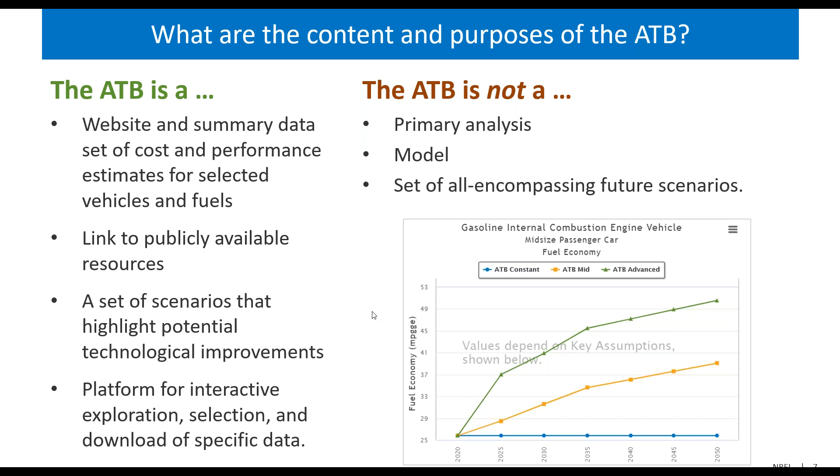So this slide provides an overview of the content of the ATB. Essentially, we're collecting a wide variety of input data about vehicle component costs, fuel and blend stock costs, and then compiling this into vehicle costs, fuel economy, well-to-tank emissions, and fuel costs, which are then used to calculate a levelized cost of driving and a well-to-wheels emissions metric, with certain assumptions about discount rate, VMT, and vehicle lifetime.

I think it's important to note here, in some efforts, the outputs are really the main focus. In this data set, the inputs and outputs are equally important, if not the inputs, perhaps to some of you, being more important than the calculated outputs. That's just important to note, that the outputs are not the entire point.

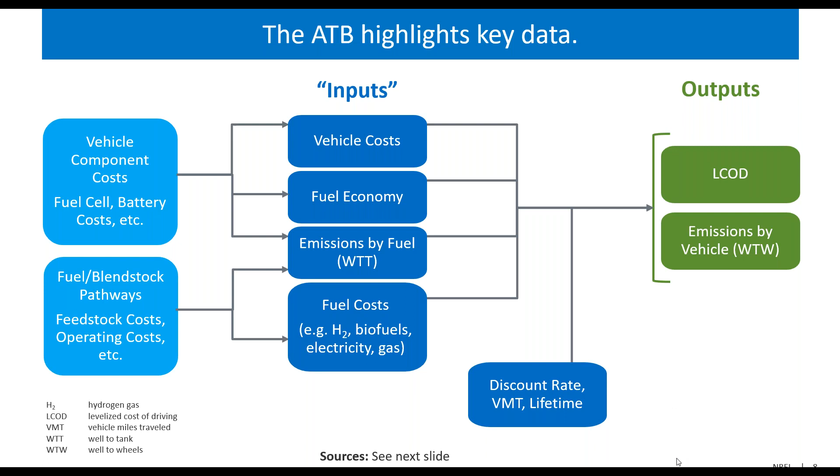And we pull this together from a wide variety of sources, which are on the next slide. So the primary sources of much of the data are listed here. There are many others listed line by line in one of the downloadable spreadsheets for the ATB. We hope that provides a strong framework for documentation so that you can track down data and understand exactly what it is that we're pulling together here.

I note on the vehicle cost components and the vehicle costs and fuel economy, much of these are input assumptions from Argonne's Autonomie modeling and also results from Autonomie modeling. The fuel data often comes from techno-economic analysis reports conducted across the biofuels pathways by the National Lab System in support of DOE. The fuel emissions at a well-to-tank level come from Argonne's GREET model, and a variety of other major sources are noted here.

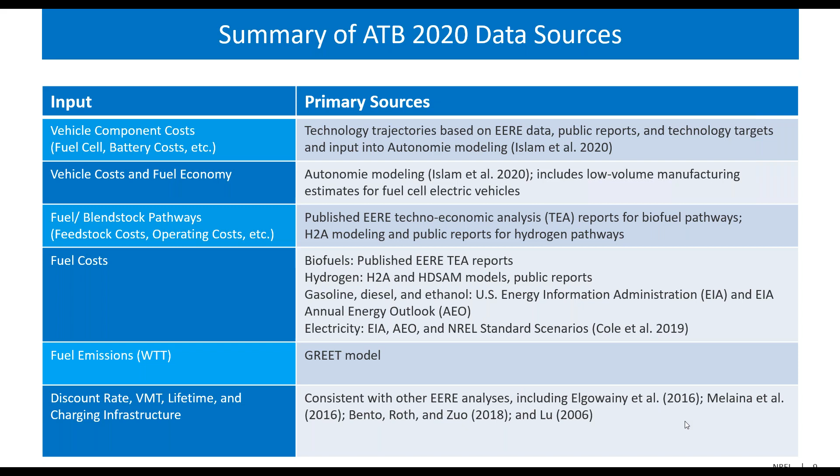So what value are we hoping to provide with the ATB? It's our hope that this will be a transparent, consistent, credible, and accessible source of data. We're consolidating from a lot of different sources, with an emphasis on DOE's sustainable transportation analysis and the national labs that support that. This is also for use within DOE and the national labs, as well as to publish those sources.

We were aiming to summarize data at a high level for system-wide analysis. So while many of the resources that we refer to dive deep into specific components, this effort is targeting translating that detail up to a higher level. And we're really trying to have this be very organized to support users in exploring the interactive charts, selecting and downloading specific data, which is free and publicly available, and we hope easily accessible.

And if, as you use the ATB, we are falling short of these goals, we would really like to hear about it. The website does have a comment function. We really welcome and value your comments and hope that you'll let us know how we can improve.

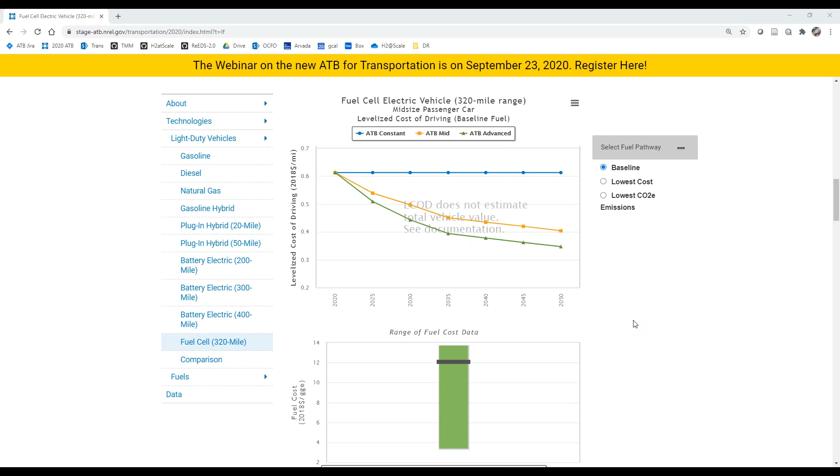So this chart shows the LCOD trajectory on the top. As I mentioned before, the vehicle cost and fuel economy are trajectories, but the fuel price and emissions are just single point estimates held constant over time. So these trajectories reflect the improvements in vehicle technologies, while the fuel estimates are held constant, and it's just showing fuel for one fuel pathway and one fuel scenario in the trajectory.

But the bottom of this chart gives you an idea of the LCOD given one fuel, but also the range of different fuel pathways included in the ATB. This bottom chart shows the range of fuel costs for all the different hydrogen pathways included. The black line represents the current pathway selected in this chart. Right now we're selected on the baseline fuel, which is kind of a current modeled SMR hydrogen, and the LCOD above reflects that price.

So if you hover over the data, you can see the selected or currently the baseline fuel, and that's at a hydrogen price of about $12 per GGE. But you can also see the other range of fuel costs included. We have a maximum fuel cost pathway, which is the current market SMR at $13.70, and the minimum cost fuel pathway, which is the future modeled SMR. So you can see the range of fuel costs, and using the filter on the right, you can see the impact of changing between those different fuels and the impact on the LCOD.

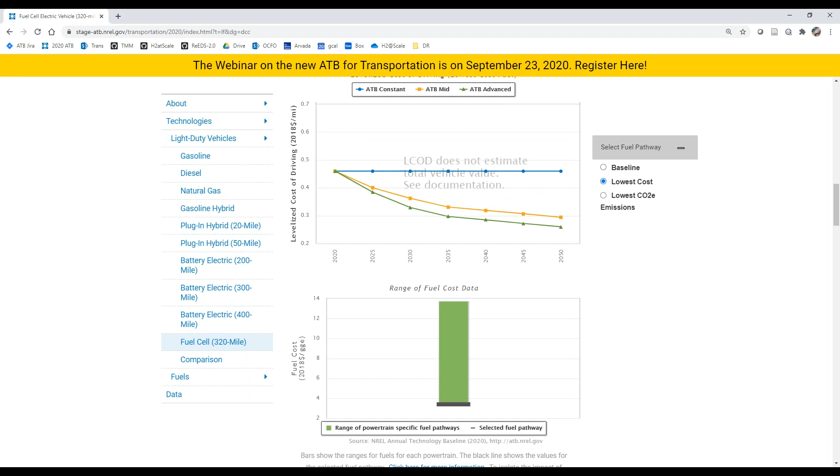So for example, using the baseline, you can see the LCOD in 2050 in the advanced scenario is about 35 cents per mile. But if we switch to the lowest cost fuel pathway, that decreases pretty substantially to now 26 cents per mile. And you can see on the bar chart on the bottom that now that black line where we are currently is on the bottom end of that fuel cost range.

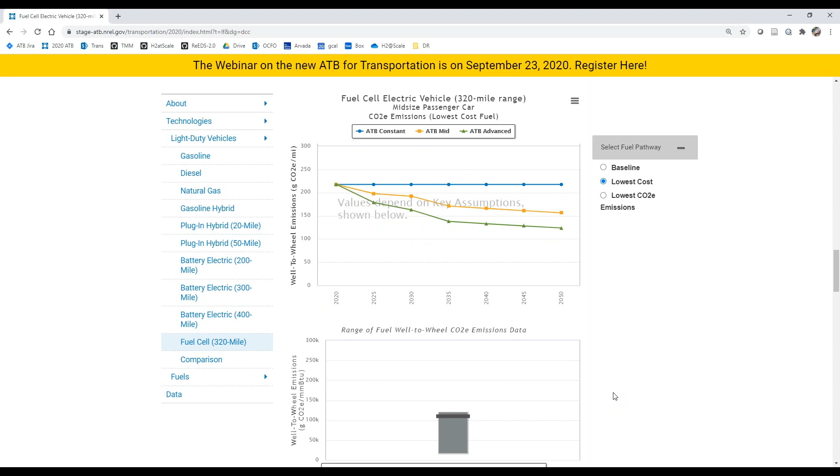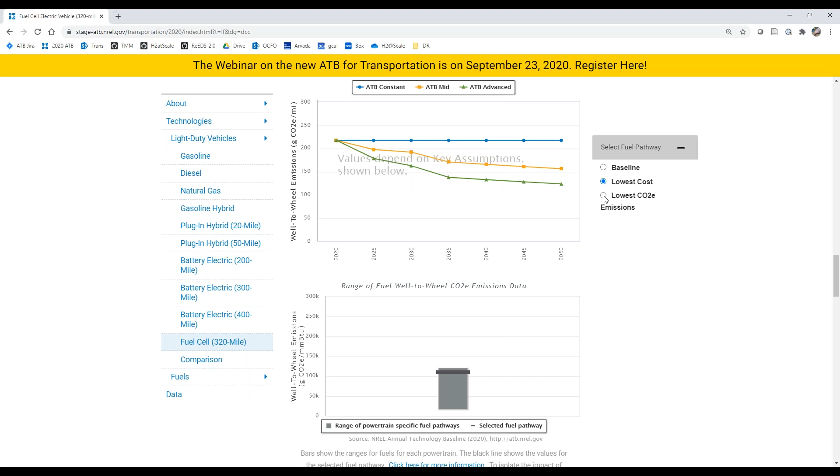So if you scroll down, the CO2e emissions chart shows well-to-wheel emissions in grams per mile, and this has similar functionality. You can see the emissions associated with that lowest cost fuel, but then you can also see how that changes if you select the lowest CO2e emissions fuel. Large decreases, and now you can see that you're at the bottom of that range, and you can use this to explore the range of other pathways and emissions that are included here.

Again, for the vehicles, just similar to the fuels, we have all of the key assumptions that are included for this technology, as well as the definition links and the references.

Hey, Paige. Yeah. While you're on this page, there's a question about the future scenarios for fuels and if they reflect estimates for 2050. Can you give an example of what that looks like here?

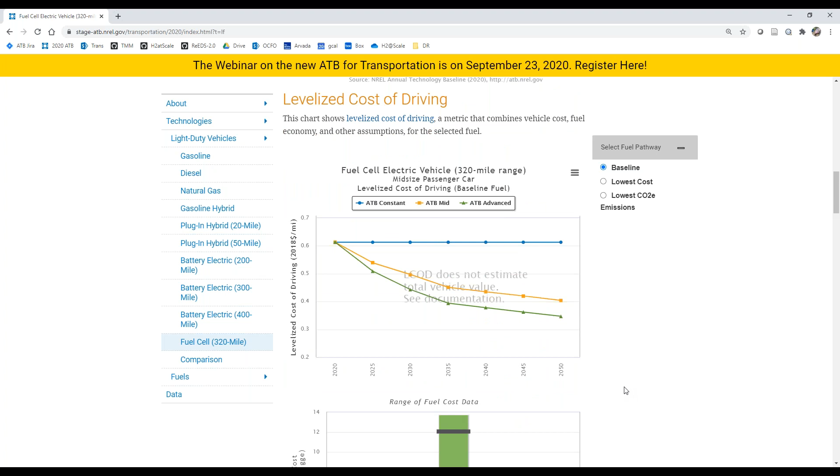Yeah, so the fuels, we don't necessarily have a specific timestamp on them. Rather, they're estimates of technology advancement as well as production volume. So for example, if you choose a future scenario here, it's going to apply to all of the years. The reason being is that we don't exactly know when that fuel is going to hit that level of technology progress or that level of technology volume, if that makes sense. So we don't have an associated year, we just apply that future pathway to all of the years in this estimate, just to see how that type of advancement would affect LCOD or emissions.

Laura, feel free to jump in, I can comment a little bit on that as well. So folks who are familiar with the techno-economic assessments done for DOE's Bioenergy Technologies Office, those techno-economic analyses have the concept of an nth plant. So the idea is that's the techno-economically feasible characteristic of a plant that could be achieved at full market volume and technological maturity with the innovations described in those analytic reports. So it's separate from any particular time frame because of the uncertainty about that.

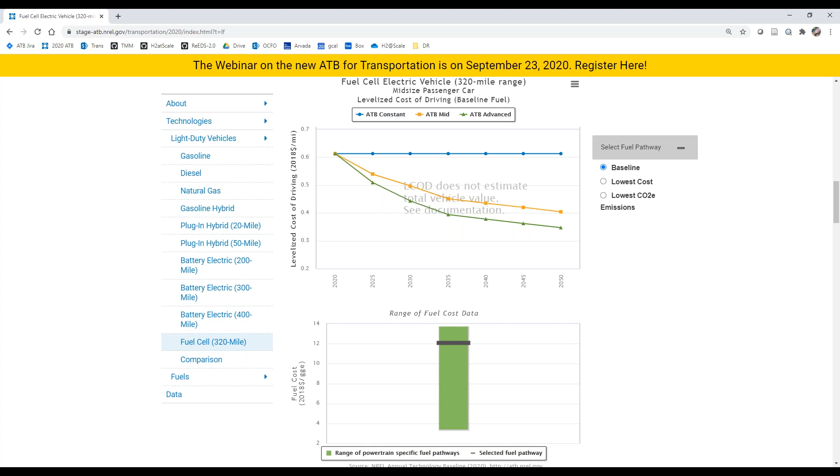Is that okay, Kara? Were there any other questions? That's it for right now. Feel free to ask more too if that didn't wholly address your question.

So I'll show one more example of a different powertrain to see how some of these metrics might vary. I'm showing a battery electric vehicle with a 300-mile range here.

It follows the same flow as the fuel cell. The vehicle pages kind of follow the same flow. So you can see the BEV has similar trends of improvements in fuel economy over the different scenarios, and again this is due to advances in powertrain technology, things like lighter batteries, increased motor efficiency, as well as lightweighting.

And then for vehicle costs, we also see large decreases here, and again this is primarily driven by reduction in battery costs. But similar to the fuel cells, it's not just about cheaper batteries, it also reflects the reductions in power requirements as the vehicles become more efficient. So your battery is cheaper, but you also don't need as large a battery to get the same vehicle range, so you have cost savings there as well.

Can you also point to the documentation of those component level costs? Yeah, the component level costs are all included in the definitions. We include the definitions for the different vehicles, fuels, and scenarios. And for each of the powertrains, we've included the associated component level assumptions. For example, in the BEVs, we have the assumed battery cost trajectories over time.

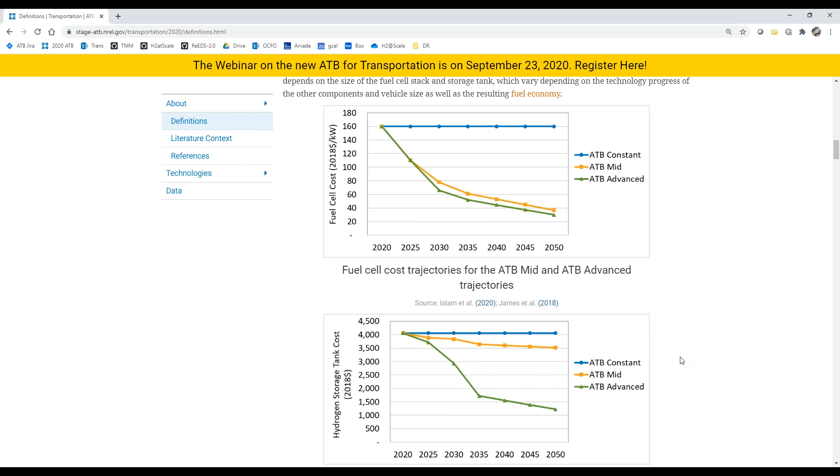This is based on work from the Argonne team and the assumptions that go into their Autonomie modeling, so you can see the battery costs here. And similarly for fuel cells, we include the assumed fuel cell cost trajectory as well as the hydrogen storage tank cost. You can review those assumptions here, again on the definitions page.

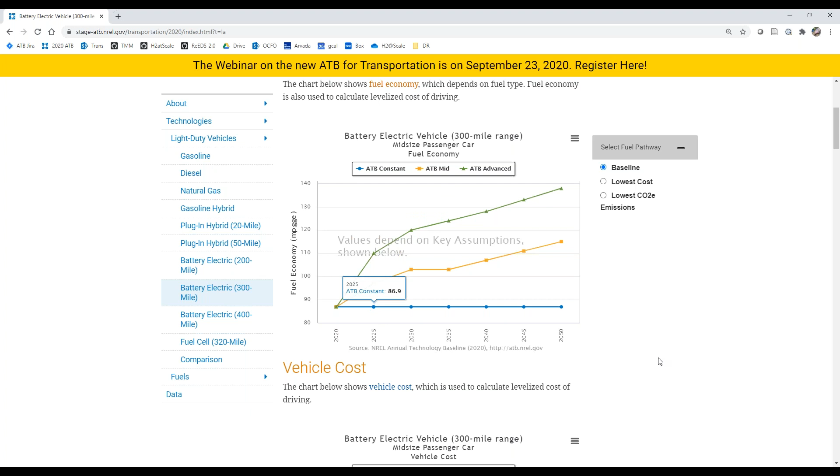Those component level assumptions were used in the Autonomie modeling at Argonne, and then those Argonne results for the vehicle level costs and fuel economy are what we're showing on the ATB.

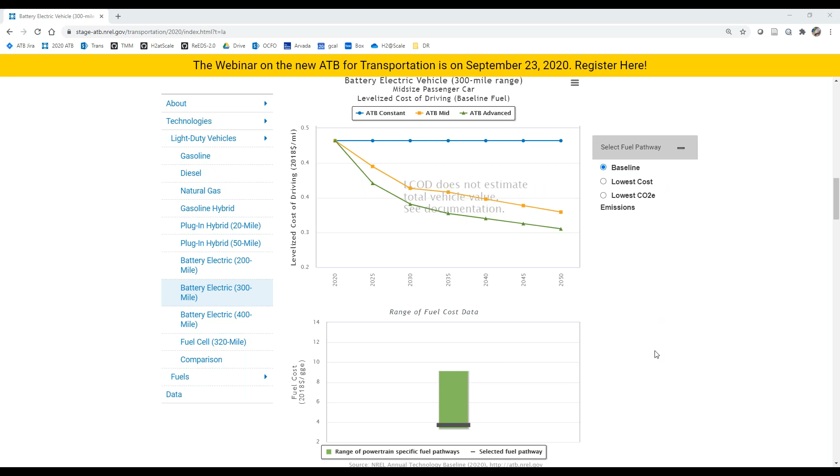So that was vehicle costs. Again, you can see the levelized cost of driving and see the impact that the different fuel pathways have on that. And then similarly for emissions, so I can show an example.

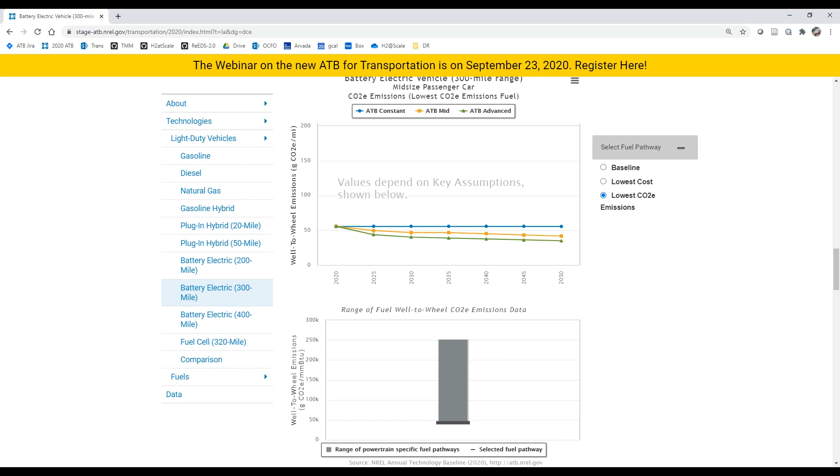This is showing the baseline fuel pathway, but if you select the lowest CO2e emissions, you can see large decreases in emissions due to an assumed cleaner grid mix of that electricity. And again, all of the key assumptions for that vehicle are listed here, so you can dive into more of the detail.

So for all of the technologies, can you point out where we get the emissions assumptions? The emissions assumptions associated with the electricity. So the emissions shown here are the well-to-wheel emissions, based on what the emissions of the electricity is.

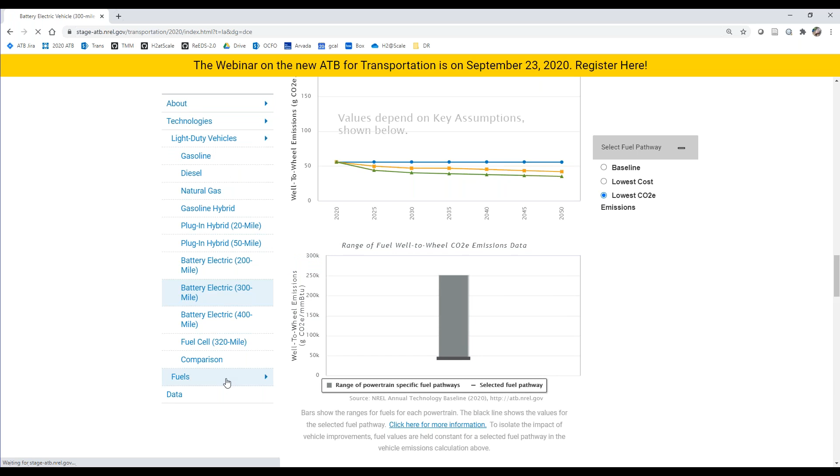So let me go back to the electricity page. The electricity page has the fuel emissions assumptions for all of the different grid mixes. For electricity, for most of the fuels, these emissions estimates are coming from GREET. Some, for some of the biofuels, are coming from specific analyses for those biofuels.

But for electricity specifically, we have the different assumed grid mixes. We're using the GREET model from Argonne to then estimate what the associated emissions are for that electricity. And then going back to the BEV.

On the electricity page, it shows the emissions per BTU, or per energy unit, for that fuel. And the well-to-wheel emissions shown here also incorporate the emissions of the fuel, but incorporate the efficiency of the vehicle as well. So you know how much emissions are associated with an energy of fuel, and then the fuel economy tells you how much fuel is needed to go per mile. So this well-to-wheel emissions incorporates both of those aspects, the fuel and the vehicle.

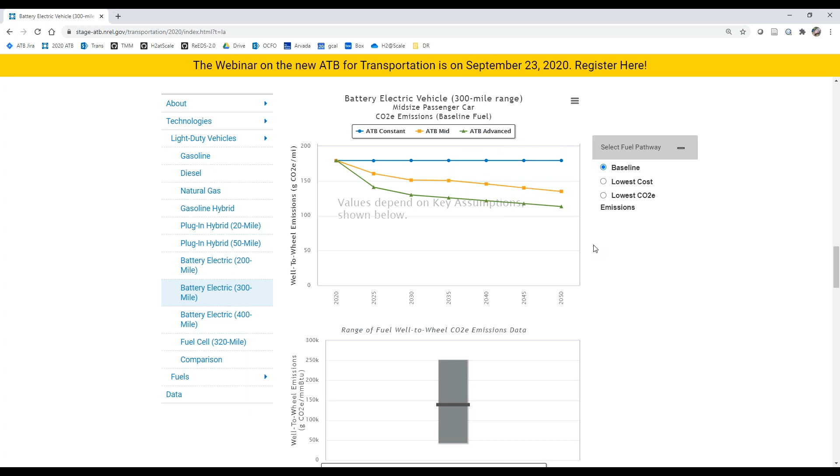Is that what you're asking, Kara? Yep. Awesome, okay.

So again, where was I? Okay, so the pages here, you can explore each of those powertrains on their own. They have similar charts, but we also include a comparison page so that you can start to view these powertrains side by side. At the beginning of the comparison page, we include some important notes that we think it's good to consider before comparing these different powertrains and saying which is more or less competitive.

These notes are that there are many different factors that go into a purchase decision of a vehicle, and some of these factors might not be directly tied to cost. For example, things like refueling time and convenience - being able to fuel your vehicle quickly, or fuel or charge your vehicle at home. And then the availability of different makes and models - maybe you want a specific powertrain, but it's not available in a small SUV, and that's the type of car you want to get. And then the introduction of new technologies like autonomous vehicles. So all of these different factors might make technologies more or less favorable from the perspective of a consumer. It's important to consider these different attributes when looking at comparisons of cost and LCOD, and drawing conclusions about the competitiveness of different powertrains, since it's not just cost - there's lots of other factors that go into buying one type of vehicle over another.

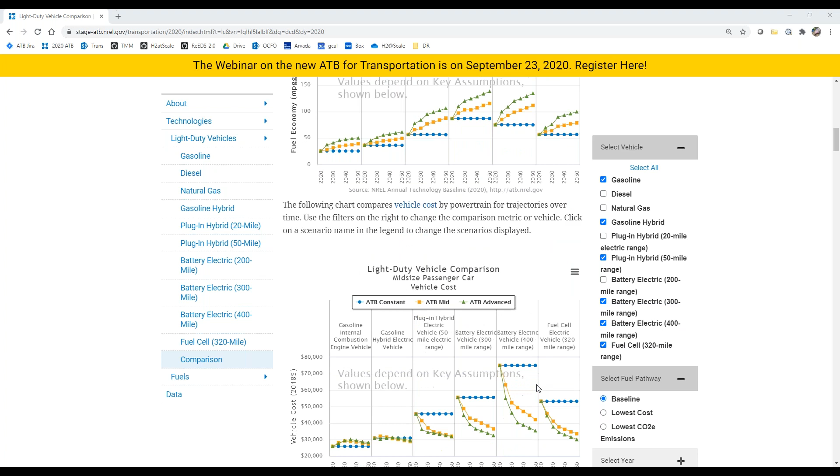But if we go to vehicle costs, things start to look a little bit different. You can see how the vehicle cost trajectories compare for all of the different powertrains. For fuel cells and batteries, we saw pretty large decreases in cost due to decreased component costs as well as other things. But if you look at more established technologies like internal combustion engine vehicles and hybrids on the left, you don't see those strong decreases, and in some cases you even see increases in cost. This is due to the increased penetration of advanced engine technologies - these are added to improve fuel economy of the vehicles, but they also come with higher costs. So you see cost increases there, but we don't see that in the advanced powertrains, since those decreases in component costs - the more expensive parts of the car like batteries and fuel cells - outweigh the cost increases for those higher efficiency technologies.

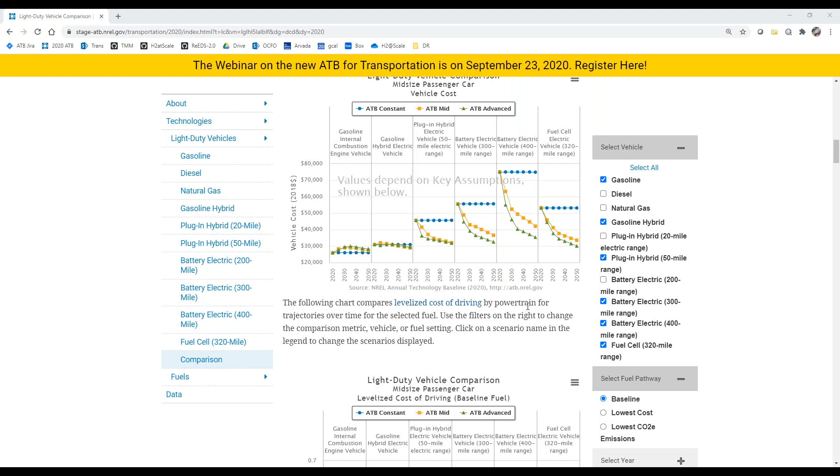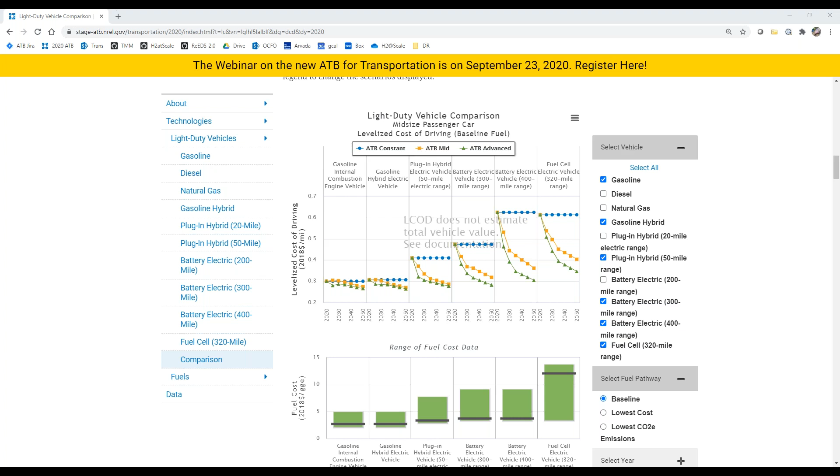Moving down, you can see the comparison of the levelized cost of driving. You can compare both the vehicles, the trajectory of the LCOD, and then with the panel on the bottom, you can also compare the range of the different associated fuels and fuel pathways with those powertrains. You can see how the cost of fuel on a dollars per GGE basis varies for all of the different fuel pathways. This chart shows the LCOD, just assuming that baseline fuel pathway for each of the powertrains. But you can see how this comparison changes if, for example, we select the lowest cost fuel pathway for all of those vehicles.

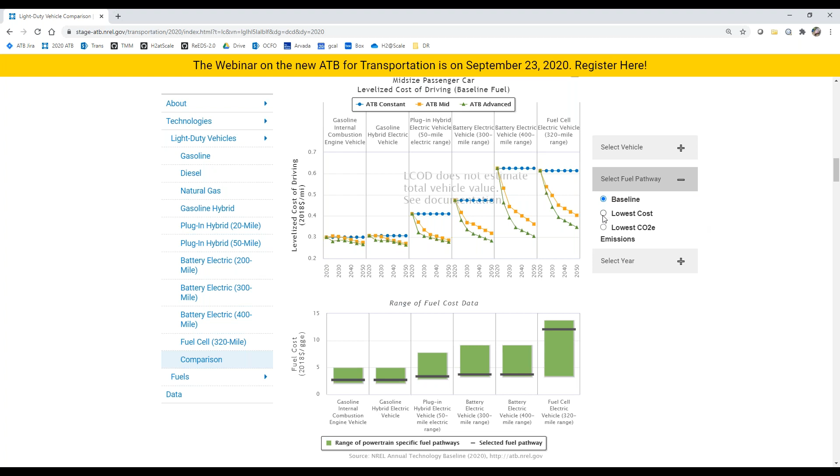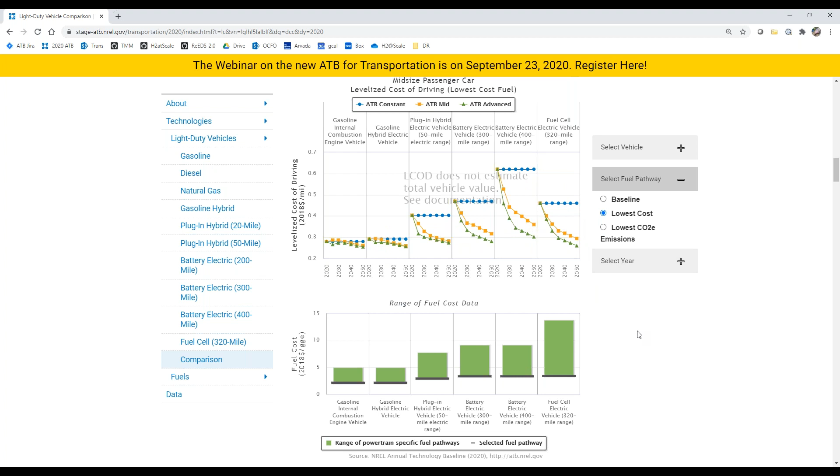So if you select lowest cost, it looks a bit different. One example is that now the fuel cell becomes more cost competitive on an LCOD basis with some of the other technologies.

If you scroll down, there's this, again, the same functionality for emissions. You can choose the lowest CO2e emissions and see how that changes the picture of per mile well-to-wheel emissions.

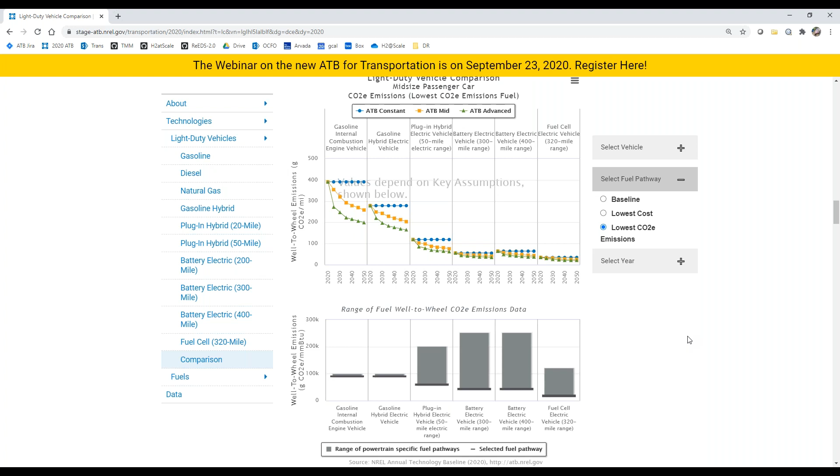So all the vehicles and fuel technologies pages are really the key content for the ATB, but I want to end the demo by mentioning a few other important pages on the site.

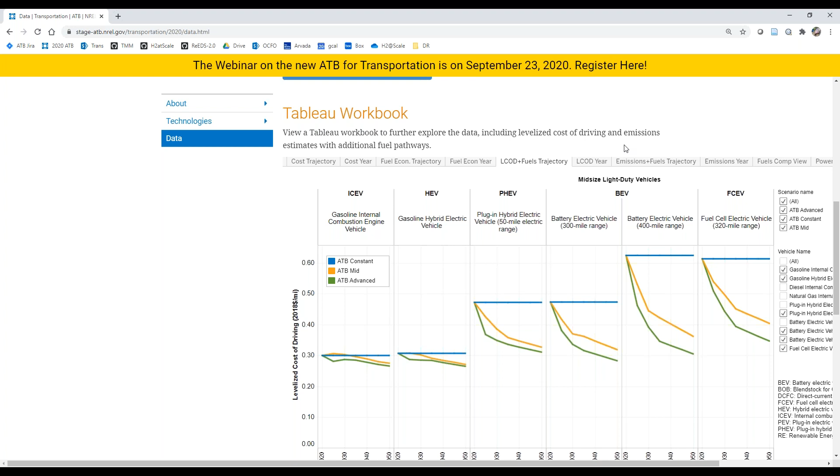And on the data page, we've included an embedded Tableau workbook, in case you don't want to download all of the raw data and create the visualizations on your own. We provided this so you can explore the full set of data.

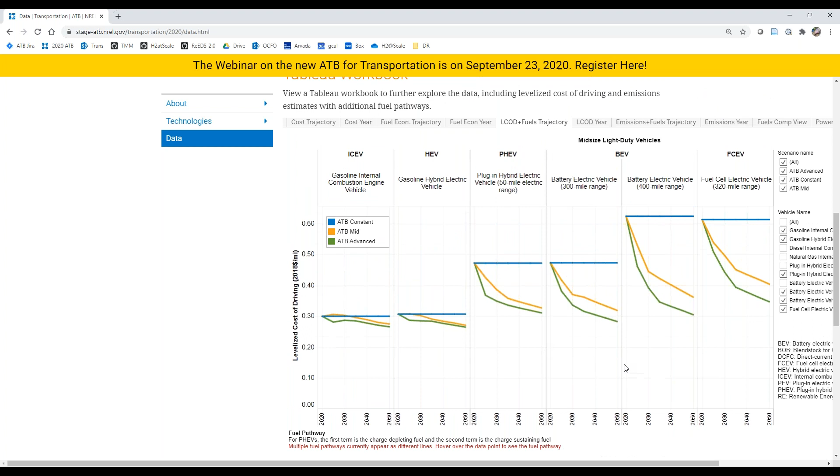For example, this shows the levelized cost of driving for the different powertrains. But if you scroll down, you're allowed to select between all the different fuel pathways available, not just the baseline, lowest cost, lowest emissions. So this allows you to explore that without having to download and create your own visualizations.

And lastly, but definitely not least, is the contact page. We would greatly appreciate any feedback or suggestions on how to make this site better, especially since this is our first year of the transportation ATB. We really want to make sure it's meeting any needs you have — whether that's different technologies to add, different metrics, other sources or references we should consider, or basic website structure, functionality, and navigation. Any feedback you have would be very welcomed.

So that's it for the web demo.

I'll close with just a few remaining slides. I hope it was useful in giving an overview of the scope and functionality of this website. We're really striving to make this a product that's credible, consistent, transparent, relevant, and accessible — all the things Laura mentioned. We want it to be useful to other analyses looking at current and future transportation technologies. Again, we welcome any comments or feedback on how we can improve this site in coming years and releases.

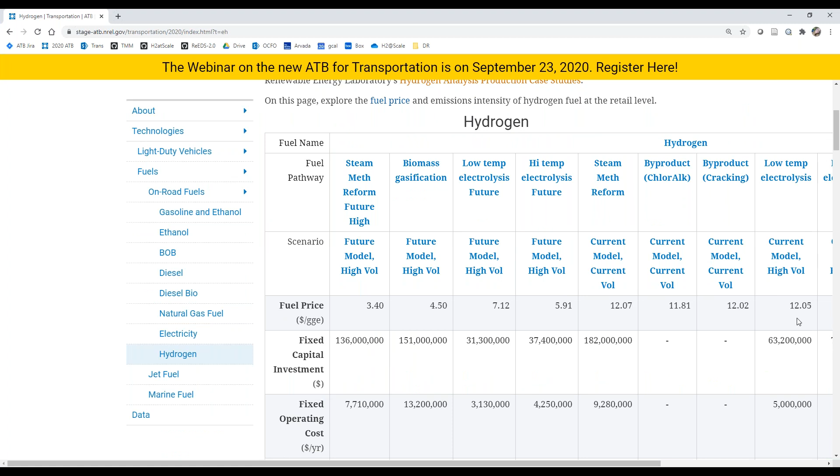So the fuel price is meant to reflect the price at the pump. And I believe we have a bullet here that details what the specific delivery and dispensing cost portion of those costs are for the different scenarios, and they vary on the delivery and dispensing technology assumed and the volume estimates. So you can explore those here on the hydrogen page.

Maybe while we're talking, go for it. Oh, sorry, Kara. I was just thinking maybe as long as we're talking about hydrogen, it might be good to address the question about hydrogen internal combustion engine vehicles. Neha, did you want to address that question? Sure.

There's a question around whether we're modeling hydrogen combustion engines or solely hydrogen fuel cells. In general, this website has been populated with data from the DOE offices, baselining the current status of technologies being funded by DOE and feasible costs in the future if DOE targets are met. Combustion engines have not been a focus of the Hydrogen and Fuel Cell Technologies Office's research for a while now, not in the transportation sector, and are also not being substantially deployed by OEMs in the transportation space. So right now, there's not a plan to include combustion engines for this transportation ATB.